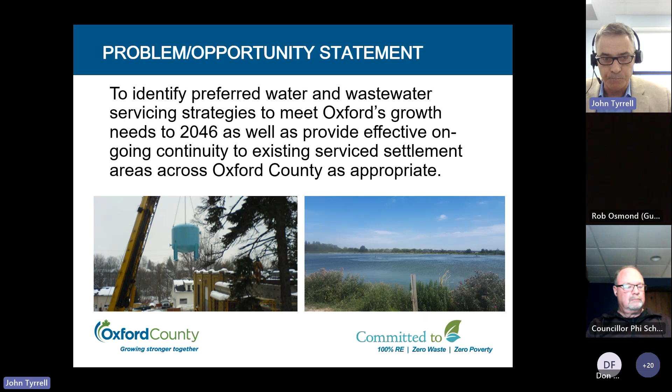That's actually a good, healthy growth rate. It's not crazy, but it's very good, because with growth like this, there's a certain level of affordability for new infrastructure and renewal of old infrastructure. As well, the other aspect to the growth that we've also tracked in this master plan, again through figures developed with the county planning, would be the equivalent non-residential population.

Sorry. John, there's a hand raised up. Okay. Go ahead, Deb. Thank you. Thank you. Can you hear me?

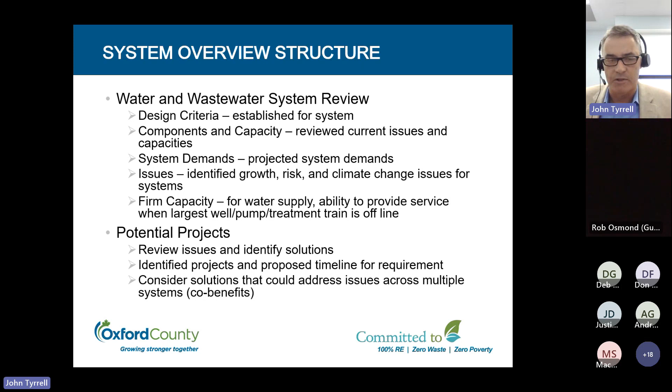When we look at the water systems, we're looking at a total of 17 systems. Each of the large urban centers, Ingersoll, Tillsonburg, and Woodstock, have their own systems. Within the rural townships, Blandford Blenheim has 3 separate systems. Drumbo and Princeton are combined; Drumbo provides the water service to Princeton. Norwich has the Oxford South drinking water system, which ties together Norwich, Otterville, and Springford. Southwest Oxford has 4 standalone systems. Sweaburg is serviced by Woodstock, and East Zorra-Tavistock, and Zorra have 3 systems of varying sizes.

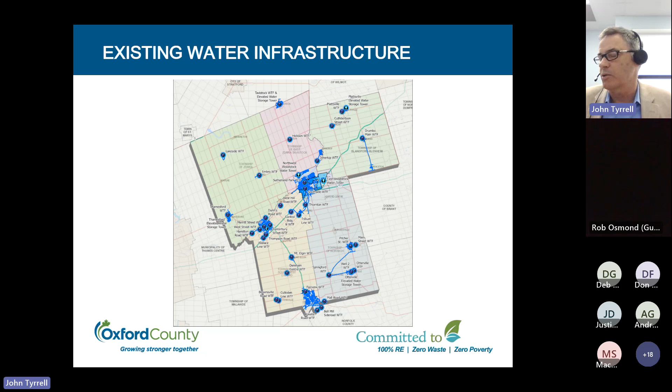I'm sure most of you know the map of Oxford County. The systems are widespread. There are some very small systems; Dereham Centre and Lakeside are particularly small. And you have larger systems as well. So it's quite an eclectic collection of systems to review on the water side, but certainly something we looked at. For example, there's about 639 kilometers of distribution water mains, 39 reservoirs and storage towers, 6 booster pumping stations, and at this point 64 active water supply wells. So there is definitely a lot going on.

Just to give everybody an idea of the components of a water system: the water supply is well-based in Oxford County, so systems are serviced by 1 or more groundwater wells. Integral to the wells is typically a pump, but sometimes wells are tied together and pumped from a common well house. Water treatment can be at a single well house associated with the well, or a centralized treatment facility with multiple wells. There's disinfection treatment to ensure the water is safe under the Safe Drinking Water Act, and aesthetic treatment if the water is hard or has iron in it.

And then once the water is treated, it's distributed to the consumers, and that's via water mains, booster pumping stations, and in bigger centers such as Woodstock, there may be different areas that have different pressure zones just because of the variation in topography. Certainly, Tillsonburg's another area where the topography varies quite significantly, so there are multiple pressure zones.

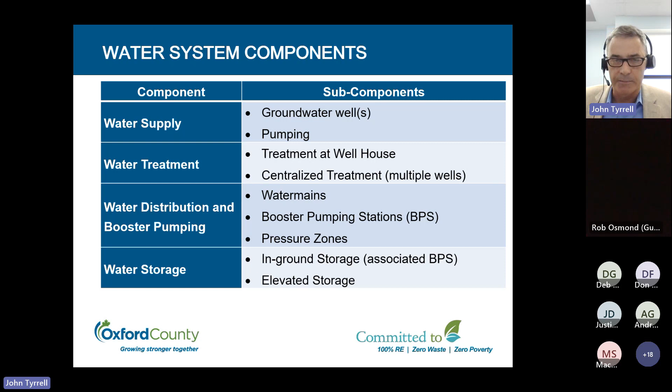So when we're looking at opportunities and constraints with the water supply system, certainly, the security of supply is very important. A little more than 20 years ago, Walkerton proved that. We tended to take water for granted until Walkerton happened, and now we really understand it has to be safe and the supply has to be secure.

So to keep the water supply secure, you have standby power to water facilities when there's a power failure, so that water can be sent into the system for people's needs. A lot of wells over time are prone to clogging and need maintenance, so there's a lot of rehabilitation that's always ongoing. Water is blended so that different characteristics of water from two different wells can be blended to make a better quality water.

Other issues there too. A lot of the bigger centers are cut or bisected by the 401 or train tracks, so there's always a need for redundancy in terms of crossings, or in terms of feeder mains twinning from well supplies. If a main water supply goes down, it'll probably take a day to 2 days to find the leak, fix the leak, get the system back and running, and the reservoir filled up. So it's a lot easier to have twinned or redundant supplies than to have to deal with that.

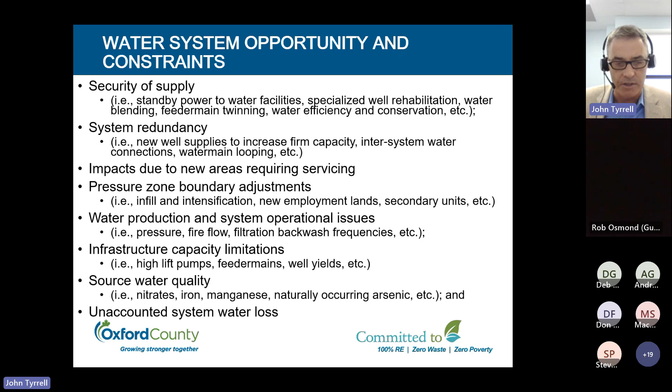And as far as when we evaluate solutions, there's sort of four broad categories that we look at. We look at the technical, social, cultural, environmental, and economic. So certainly on the technical side, if there's a noted deficiency in the water supply system, we have to address it. We certainly look at constructability. How easy is what we're planning to construct? Will what we're putting in make operations easier? It's more important to put the simplest solution in a lot of cases than the most complicated.

We have to look at the infrastructure required. We also have to maybe look out a little bit further to make sure that we've got enough land, not necessarily for 25 years, but maybe for another 25 years after that. We have to look at the approval requirements. The Ministry of Environment has approval requirements for water systems. There's also requirements depending on where the systems are located, if they're in regulatory areas, and the conservation authorities may have input as well. Certainly, risk mitigation is an important consideration: regulatory, supply security, and climate change.

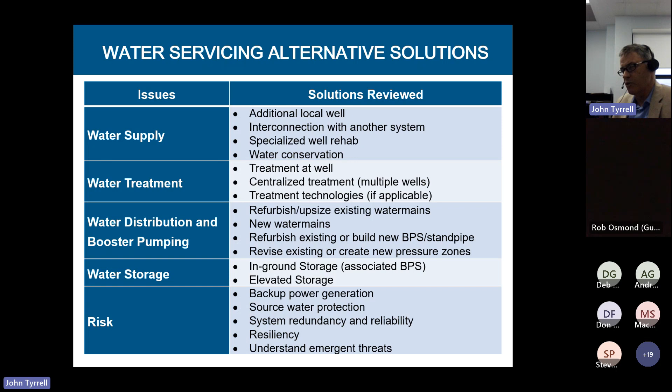And then also understanding emergent threats, and these are things that are not localized to Oxford County, but there's a lot of things that are happening in the water industry. There's a lot of research now underway with things like microplastics in the environment. So the county does not necessarily have to take a lead, but the county is very involved in the American and Ontario Waterworks Association, and so they've got a good understanding of these things going forward, and certainly they can bring expertise as these issues develop.

So now we're going to turn our attention to the different water systems, and just give you a very high-level overview of what we're looking at. As far as servicing capacity goes for Ingersoll, the water capacity should be adequate to 2046. The existing storage capacity will be approaching a deficit towards 2046. So that's far off, and that's a few master plans from now. So that's something that will be watched.

As far as key infrastructure projects that were identified, there's the water distribution system extensions to service the Southwest Industrial Park, and also addressing the issue of more than one 401 crossing for the water supply. There's also the Wallace Line trunk main and a South Thames trunk main as well.

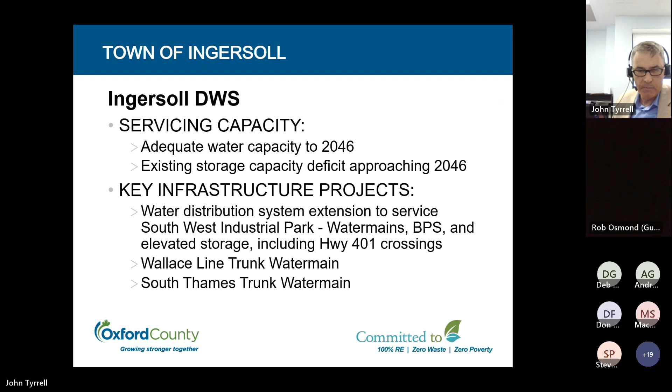With regard to Tillsonburg, there's adequate storage capacity to 2046 and adequate water capacity as well. As far as infrastructure projects, we're looking at upgrades to wells 3 and 7A. Well 3 is a well that was drilled in the 1960s. It's just off of North Street. It's not in production, but it's potentially a good well to bring into production, because there are some wells that have, not operational issues, but a lot of maintenance required. So certainly the county's looking at upgrading and bringing well 3 into service to assist with security. And then well 7A is on Broadway, and it's being brought into service as well, replacing well 7 in its location.

Water security, again: replacement of the Mall Road wells, backup power at North Street, and then also specialized well rehabilitation to maintain well yields. We're looking at water distribution extensions to service residential, employment and infill areas. Again, this involves trunk water mains, water main looping, and upsizing.

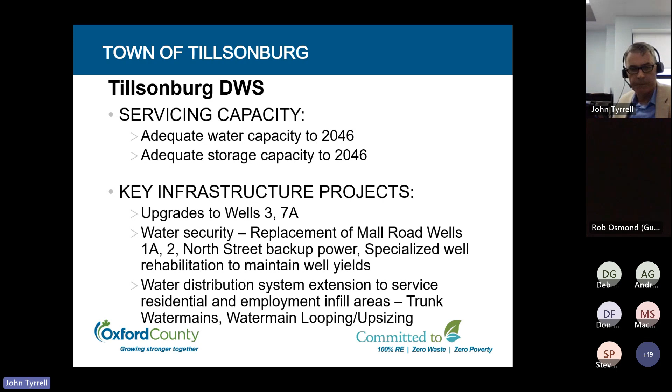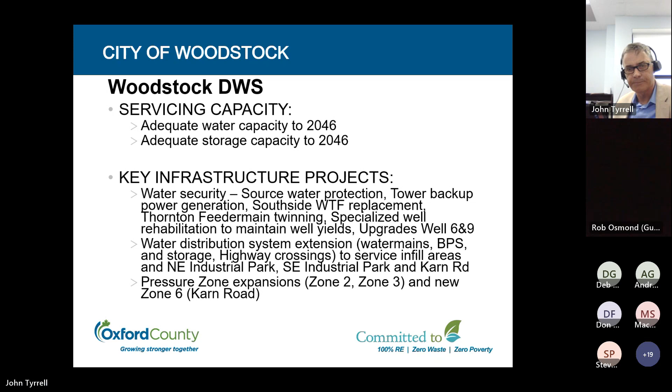Drumbo, the township of Blandford Blenheim: for the Drumbo Princeton drinking water system, the water supply capacity will need to be expanded by 2031. There is adequate storage capacity to 2046. So key infrastructure is a new well supply, specialized well rehabilitation, standby power to the existing well fields, and water distribution systems extensions to service infill areas.

Plattsville and Bright, we're putting them together. Plattsville has adequate water and storage to 2046. Bright has adequate water supply and storage to 2046. But key infrastructure: Plattsville, we're looking at a new well supply for security of supply. The two major wells are not in the Nith River, but they're on either side of the Nith River.

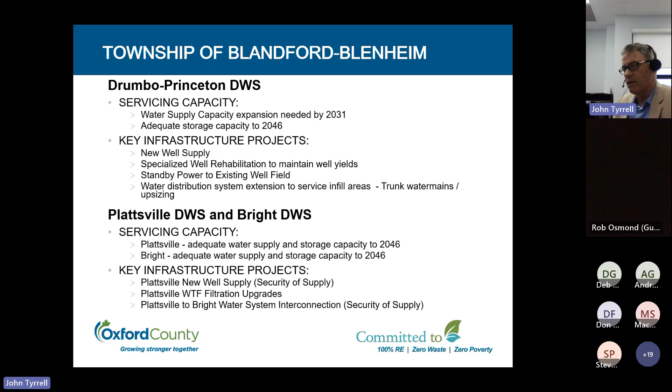And Plattsville, we're looking at manganese filtration upgrades. Bright also needs that as well. So I think one of the driving forces with Bright, and also for water security, is to interconnect the two systems together, because that way, instead of building two manganese treatment facilities, you build one. And again, you get more redundancy rather than Bright trying to rely on its own system.

Oxford South drinking water system in the township of Norwich. It has an adequate water supply to 2046 and storage to 2046. Key infrastructure upgrades: Norwich well 4, we're looking at a manganese filtration system there. A new water supply for the system for security of supply, and then again some additional storage at the well 4 water treatment facility, again to help with security of supply.

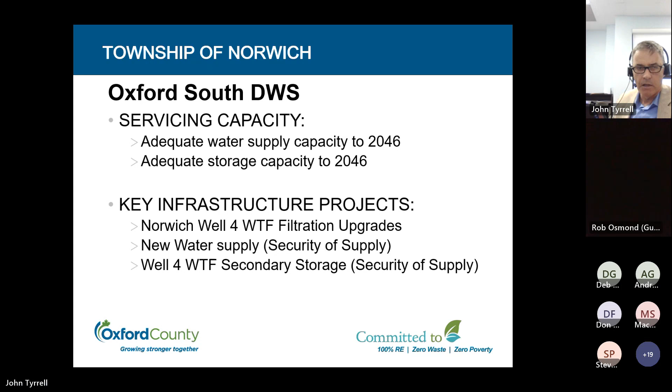Mount Elgin drinking water system. The water supply firm capacity will be in deficit approaching 2031, and there is adequate storage capacity to 2046. Key infrastructure that we're looking at is the water treatment facility optimization, to make sure we're getting the full design capacity out of the two water treatment plants in Mount Elgin, and also in the future looking at a trunk water main connection to the Ingersoll system for security of supply, and to allow for planned growth if needed.

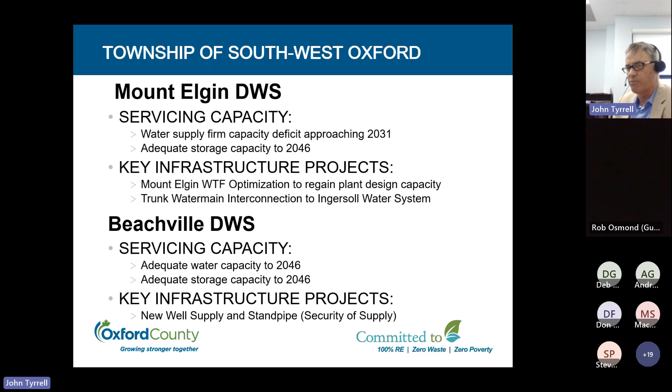Beachville has adequate water capacity to 2046, and adequate storage capacity to 2046. However, Beachville is a small center; it only has one well, so key infrastructure projects would be a new well supply and a standpipe for security of supply. Again, within Southwest Oxford, the Brownsville drinking water system has adequate water storage capacity to 2046, and water treatment capacity. Key infrastructure: water quality improvements, and filtration upgrades as well for security of supply.

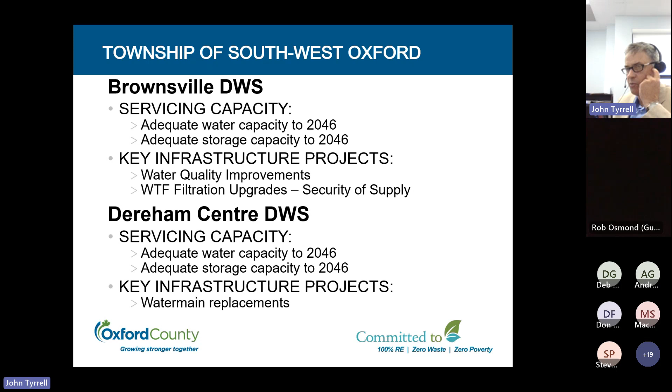Dereham Centre, very small system. It has adequate water capacity to 2046 and storage capacity to 2046. And the only infrastructure would be just water main replacements as required in that community. East Zorra-Tavistock, the Innerkip drinking water system. Again, it is serviced by Woodstock. It has adequate water capacity to 2046 and adequate storage again to 2046. Key infrastructure projects would be water main replacements there.

Tavistock, adequate water capacity to 2046. Additional storage capacity will be needed by 2028. So key infrastructure will be a new well supply, treatment, additional storage at the well 4 site, and again a manganese treatment facility, and also distribution system extensions and upsizing for growth in that community.

Hickson has a very small system, and there's no issues noted there other than it has one well supply, but the system is so small, if there was an issue with the well, trucked water would probably suffice in the short term to address any issues there.

Within the township of Zorra, the Thamesford drinking water system has an adequate supply to 2046, and presently it has a minor capacity deficit. So for the infrastructure projects, we're looking at doing something with the reservoir to make it more efficient. Part of the reservoir is being used to provide water disinfection.

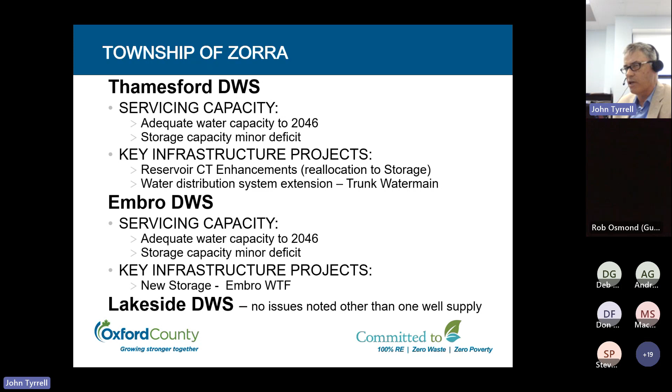Embro drinking water system. It has an adequate water capacity to 2046. A minor storage deficit now, so looking at new storage capacity within Embro at the water treatment facility. And Lakeside, no issues noted, other than again one well supply.

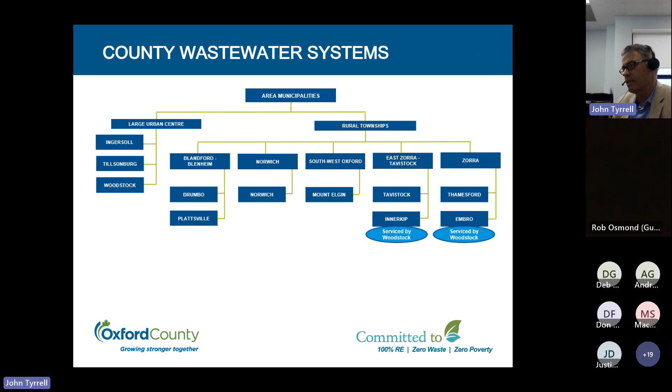Innerkip's sanitary servicing is provided by sending its sewage via pumping station and force main to Woodstock. Zorra, similar to East Zorra-Tavistock, Thamesford has its own system. Embro collects and then sends its sewage to Woodstock as well. So that's sort of showing where the systems are. There's over 600 kilometers of sewers and force mains, 27 sewage pumping stations, 9 wastewater plants. Again, there's a lot of other complexity in there too.

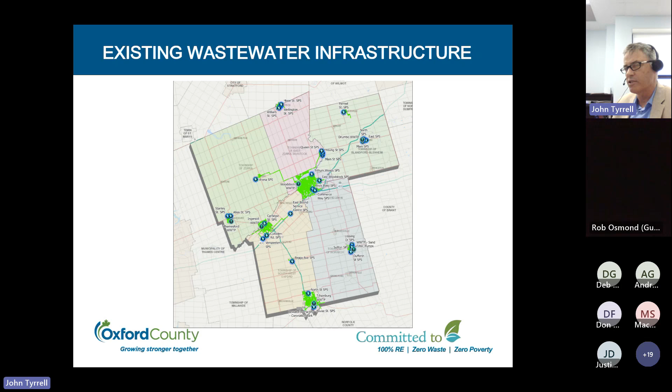There's also the biosolids management center at the Salford landfill or beside it. So there's quite a bit going on there.

It's going to take a little bit of water here.

So just to give you an idea of what we're looking at in terms of components for the wastewater treatment system facilities, I think we all understand that when you flush a toilet, gravity sewers will take the sewage from houses to the street, and then the subdivision will send it to larger sewers, which you call trunk sewers.

And then if the wastewater plant's directly downhill, it can go all the way there, but in a lot of cases it can't. So the sewage is sent to a sanitary pump station where it's collected, and then it's pumped via force main, which is like a water main except it has sewage in it, and then it will basically go to either another part of the collection system or to the wastewater plant.

A siphon, there are a few within Oxford. Basically, that's where you have a gravity sewer that's going underneath a river, and in that case, the siphon works like your toilet. The water level's higher on the upstream side, and it'll push the water and solids to the downstream side.

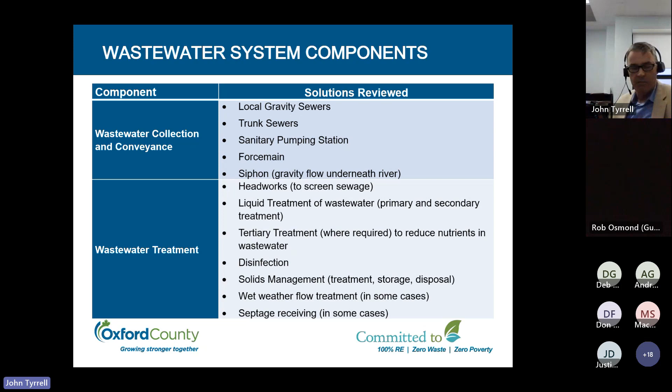So when we're looking at the opportunities and constraints, similar to water, they're a bit different. Obviously, the security of conveyance and treatment, standby power to pumping stations and wastewater plants. There's also need for facility resilience due to climate change. Typically, water flows downhill, so pumping stations and wastewater plants are typically in lower areas. With climate change, there has been a rise in the level of flooding or projected flooding. So again, we have to take that into account.

System redundancy, treatment train flexibility, solids handling capacity at wastewater treatment plants. Lagoons are sometimes good where they're used because they can hold a lot of water in them. Force main twinning: if you lose one force main and you don't have an alternate route, or it isn't twinned, then you're basically pumping into trucks and sending the sewage to the wastewater plant, which is expensive, and then additional trunk sewers for redundancy.

The impacts to new areas requiring servicing. Certainly, there's collection system expansion that can be infill and intensification, new employment lands, and then secondary units, etc. There's always concern for wastewater and pumping operational issues. I mentioned wet weather events, odor control, and then maintenance of discharge criteria. Each plant has a certificate of approval from the Ministry of the Environment and Climate Change, and that requires it to maintain discharges below a certain level for certain contaminants. So that's something that has to be done regardless of what's flowing into the plant.

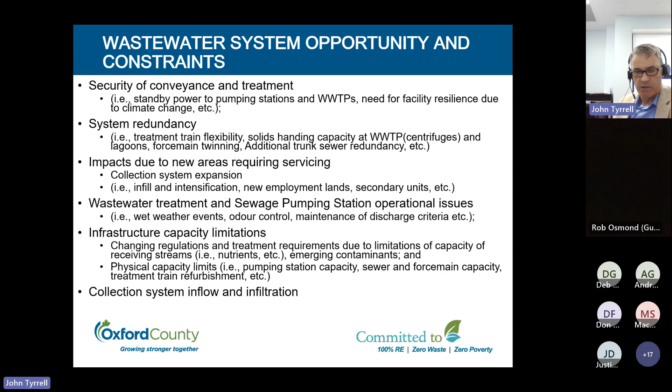So again, county level solutions: do nothing, not really considered; limit growth, not considered. Infiltration and inflow reduction, where the county has specific ongoing initiatives. And also through the master plan, we've noted where there are some systems that may require additional study of this. And then again, for wastewater servicing, each system was evaluated in terms of the need for new linear infrastructure, pumping, treatment expansions, etc.

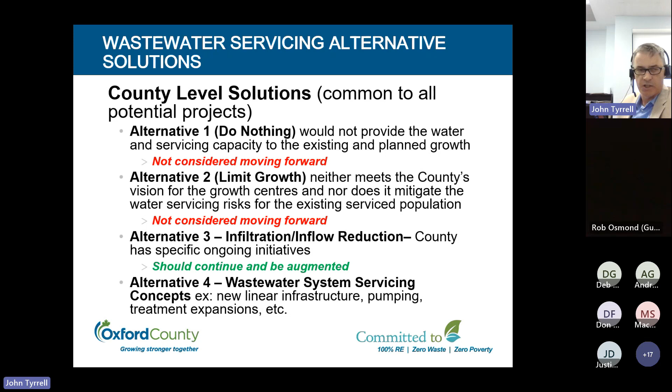So again, when we're looking at alternative solutions for wastewater collection and conveyance, reducing inflow and infiltration to sewers, that's a great long-term idea. It takes a lot of money and a lot of time to do that because you have to identify where the leakage or the inflow is, then you have to fix it. Fixing it is expensive, whether you're relining a sewer or you're digging down and replacing a sewer. So that's sort of a generation or two to do that way.

There's refurbishing and upsizing existing sewers, putting in new sewers, refurbishing or upsizing existing pumping stations and force mains, building new pumping stations and force mains. And then again, you can maybe also realign some existing sanitary sewer catchment areas to better manage flows. On the wastewater treatment side, again, you can reduce the inflow into the plants, but there are also methods of treating it as well, separate from or as well as the normal treatment.

Optimization of existing wastewater treatment plants or components is an important concept. Typically, when you're looking to expand a plant, one of the first things the plant owner will do is see what more they can get out of the plant without expanding it, to set that as the baseline for future work. Certainly, there's refurbishing, expanding wastewater treatment plants or their components. Again, sending sewage to another wastewater plant via a sewage pumping station and force main. Innerkip and Embro have done that. Instead of building two additional wastewater plants, the flows are now coming into Woodstock, where there's capacity in a larger plant that can efficiently treat it.

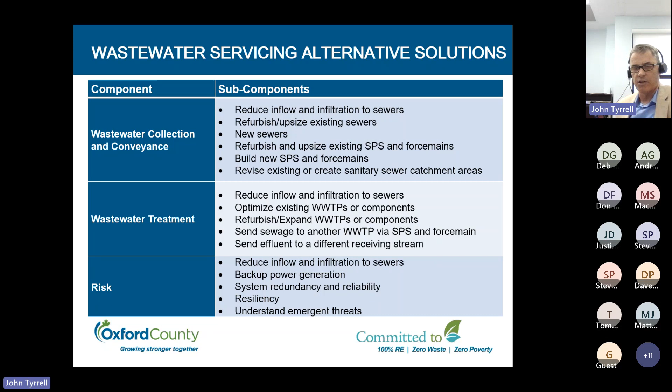Risks: again, reducing inflow and infiltration of sewers is an important thing. Backup generation is an important concept. System redundancy, reliability, resiliency; again, low areas and higher flood lines might be something you'd have to deal with. Understanding emergent threats, things like contaminants that we don't understand now, but maybe 10, 20 years from now will be a requirement to address. The county belongs to different professional and municipal associations where they're kept abreast of these sorts of things, so they're in good standing to know what these are when they have to be addressed.

So when we're looking at the different systems, we're just going to go through them. There's only 9 this time, so a little bit faster. The Ingersoll wastewater plant should have adequate capacity to 2046. Key infrastructure projects: wastewater system extension to service the Southwest Industrial Park, including 401 crossings, and the Wallace Line and Hamilton Road trunk sewers. As far as risk goes, a second trunk sewer crossing of the Thames River would probably be a good idea, and then upgrading the wastewater plant's headworks.

Tillsonburg: the planned wastewater expansion that's ongoing now should be able to service on-hold development and future growth to sometime beyond 2041. So at the very end of this cycle, there may be a requirement for a phase 2 capacity expansion. A master plan or two from now will be able to tell you that with more certainty. Other infrastructure requirements would be sewer trunk replacements and upsizing, a climate change resiliency study for the wastewater plant and pumping stations, Stony Creek trunk sewer rehabilitation, upgrades to the John Pound pumping station and force mains, extension of services to residential and employment infill, trunk sewer upsizing, and upgrades to the Rolph Street sewage pumping station.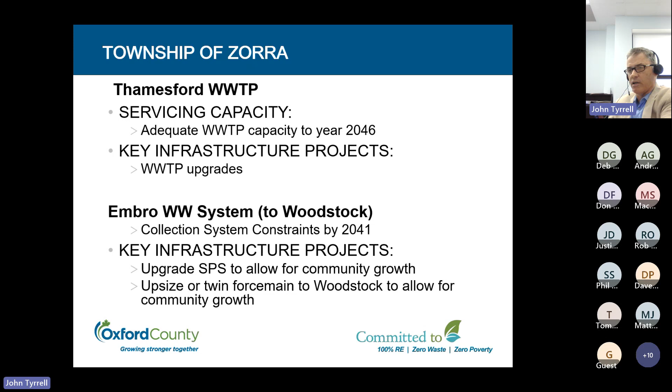So again, the wastewater capital program, there's additional details that will be provided in this handout once it's placed on the website. Again, the total over 25 years, it looks big, but divided by 25, there's certainly a lot of work to be done in the first 5 years to address certain issues right now and impending growth. And then the further out growth, there will be a couple master plans to better define that going forward. So those are the specific wastewater capital programs. We talked about the water one.

So there are some additional projects that would help with the policies and strategies for the county to make sure that it's got its eyes on the puck as far as its water and wastewater infrastructure. Some of the projects and strategies that have been identified include fire rated systems policy in the next 5 years, backup power prioritization policy to see which facilities, both water and wastewater, need to be prioritized in terms of backup generation, consultation for servicing upgrades policy. That'll be a recurring requirement every 5 years or so. Connected system rate servicing policy every 5 years. Water wastewater master plans will be required every 5 years to keep things up to date, and same with the development charges studies, the technical studies that support the development charges.